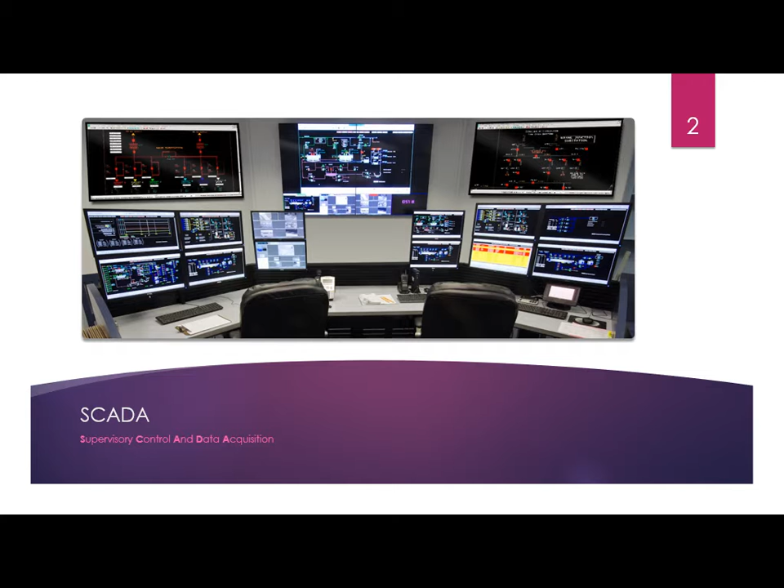What's the advantage of using such systems? Basically, having access to real-time information helps us, if anything goes wrong, to take immediate corrective actions. In addition, we can input this real-time information to simulation models, so we can have some prediction about the probable problems we may have further on, and also take some preventive actions.

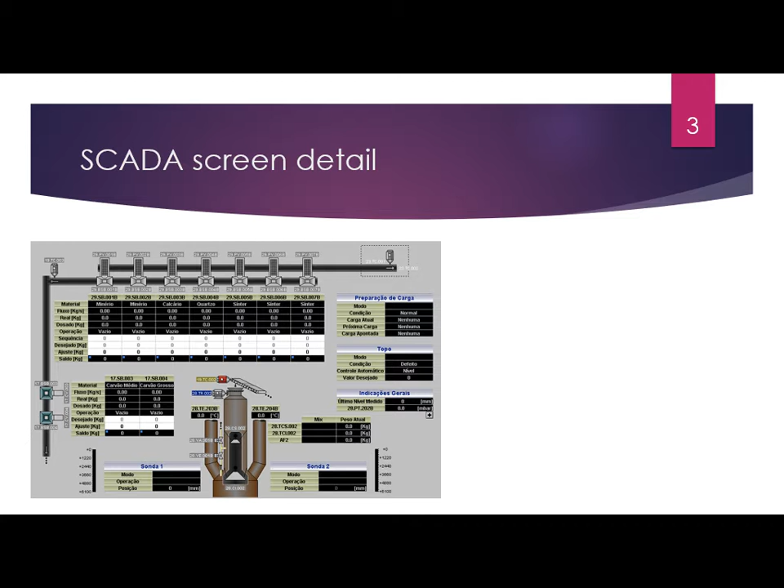This is an example of a synoptic SCADA screen detail, a real case done by my colleague Ricardo. You can see the operator has access to information about different parts of the operation and the key information about each part.

This information has different pieces: the mode of operation, so the operator can see if the operation is automated, manual, or local. Also, the operator will have access to information about equipment's status, whether it's running, stopped, or waiting.

If there is any equipment fault, the operator will see it on the screen, and if the fault is serious, the system will notify the operator with alarms. The last piece of information, maybe the most important one, is the interlock conditions of operations.

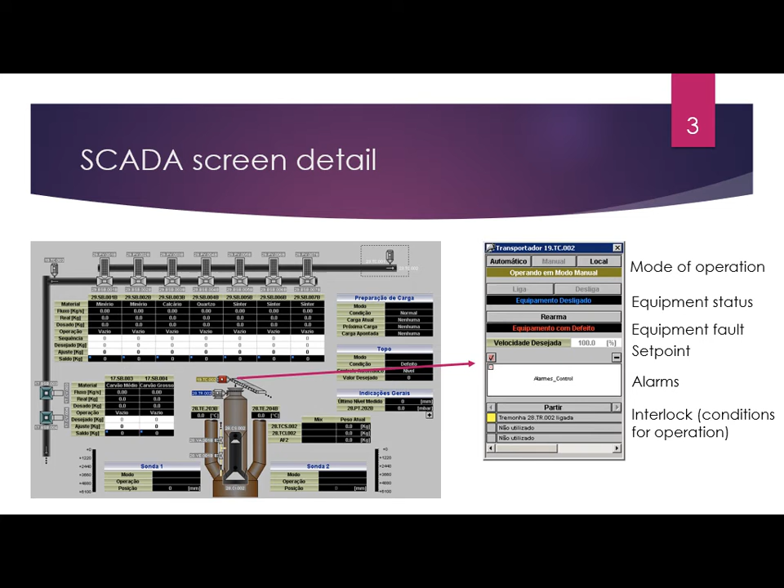But we have significant differences between manufacturing and construction. One of the most important is that in manufacturing, we are dealing with fixed routes. Basically, manufacturing products are moving from machine to machine, or from worker to worker, or a combination of them, so we have a fixed route of product movement.

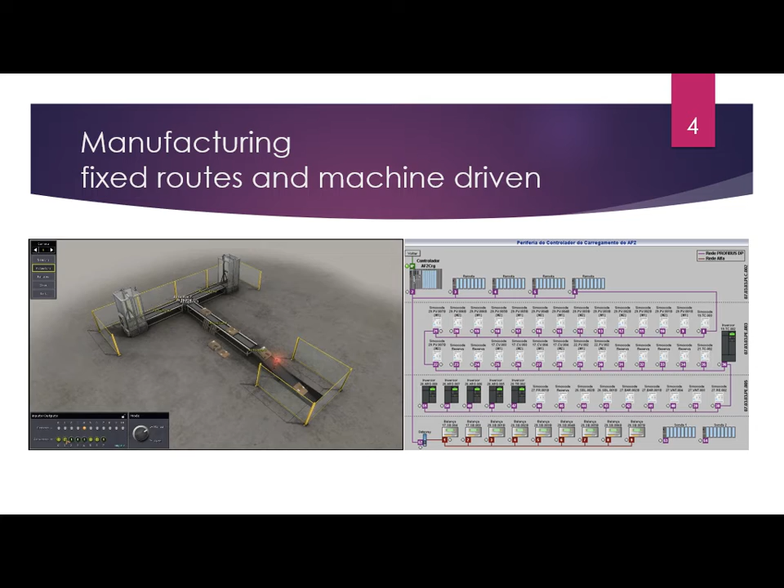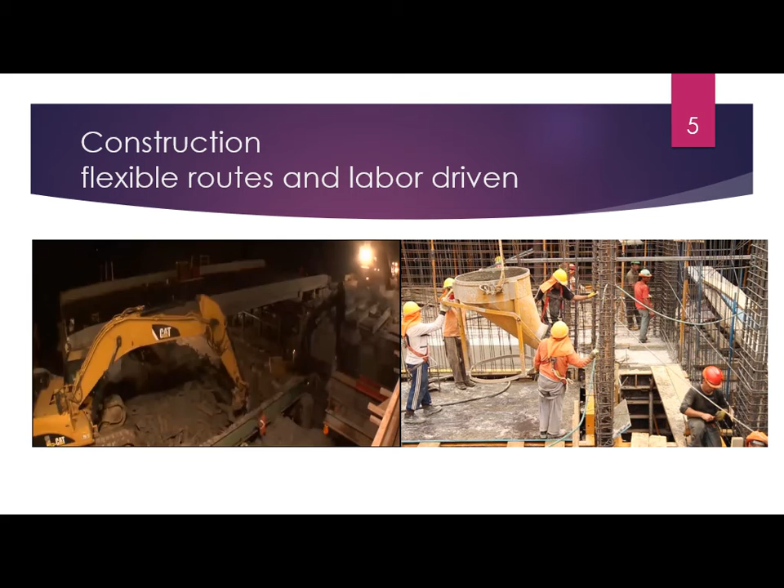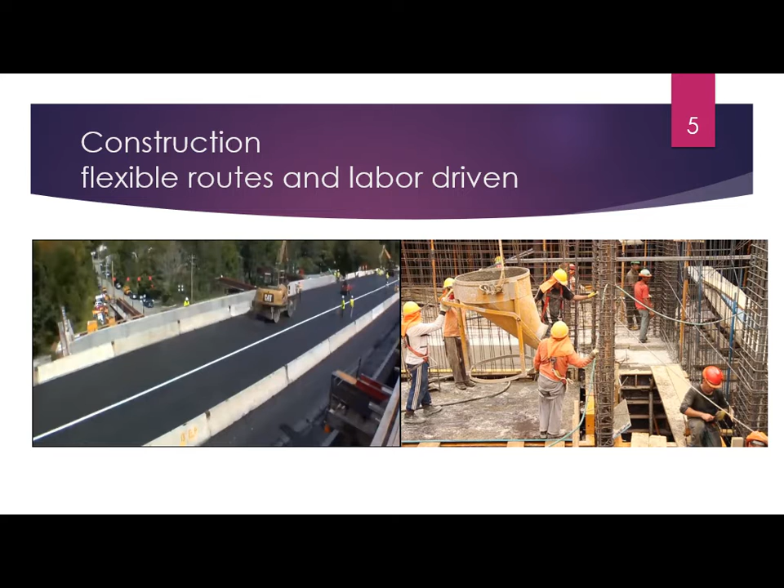Also, we have some routes which don't even exist when the project starts. This is a bridge renovation, and we have different stages. It starts from demolition, so at the demolition stage, whatever route we have is related to demolition. But then, when demolition is done, we move to installation of the prefabricated pieces, so we have completely different routes at this stage.

In this study, we try to address how we can address these issues within an integrated framework. This framework is developed based on two pillars: the observer effect and Genchi Genbutsu. The observer effect refers to a term or theory in physics; it defines if the observation act can change the event.

For example, this theory says that if we have an observation, it will alter the event. When it gets to human science, we can translate it as: observation can change the behavior. It means that if people get aware of having an observation, they can change their behavior. It can change the system and accordingly the model. So in our framework, we have included continuous observation and its effect.

The second principle, Genchi Genbutsu, is a term you know better than me. In the Toyota production system, it means get the fact, go and get the fact before making decisions. Basically, it means avoid any middle person for making decisions, get the information directly.

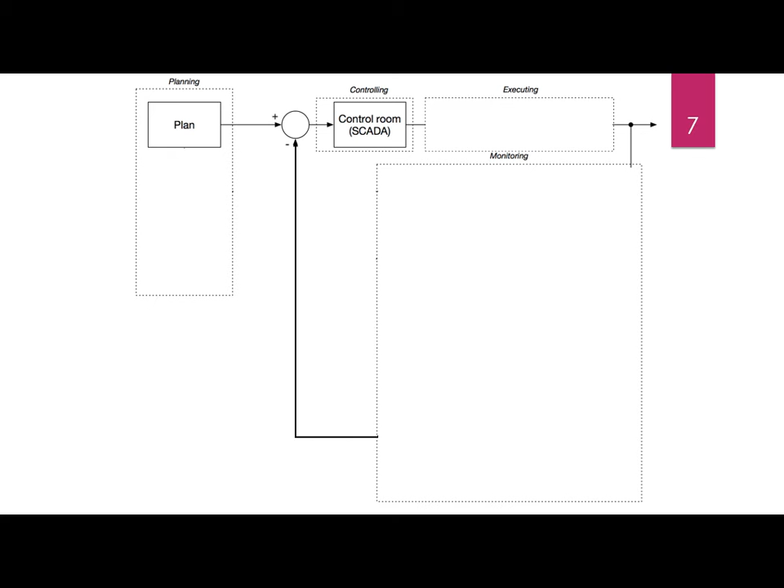In order to put these two principles into practice, we need to turn our management office in the construction site into a control room, similar to what we had in SCADA. This control room can monitor the system and steer the production. If any corrective action is required, they can send commands to the automated or non-automated parts of the construction.

If you remember, we talked about a synoptic screen we have in manufacturing. In construction, BIM can play the same role because it provides us with a 3D model and a whole set of information about equipment, workers, and schedule.

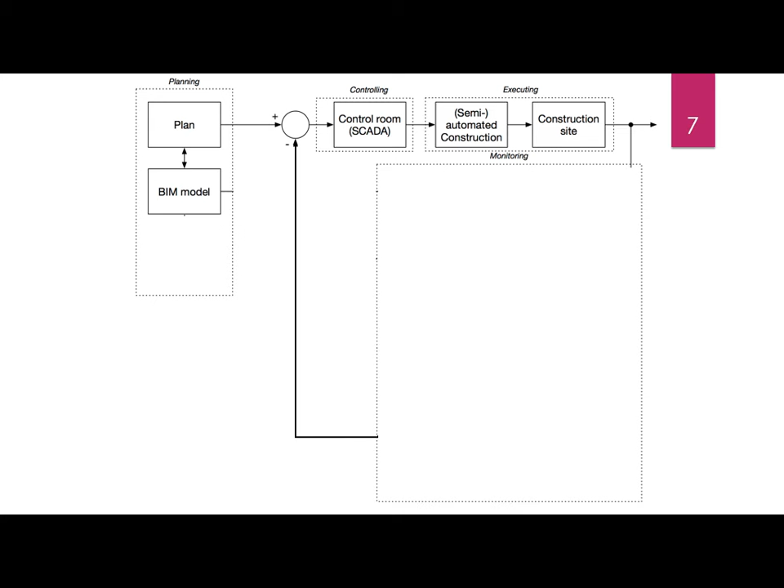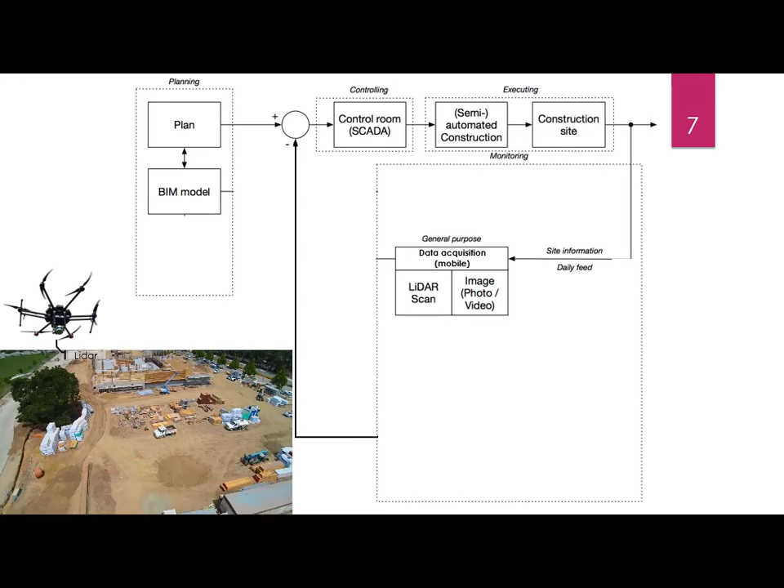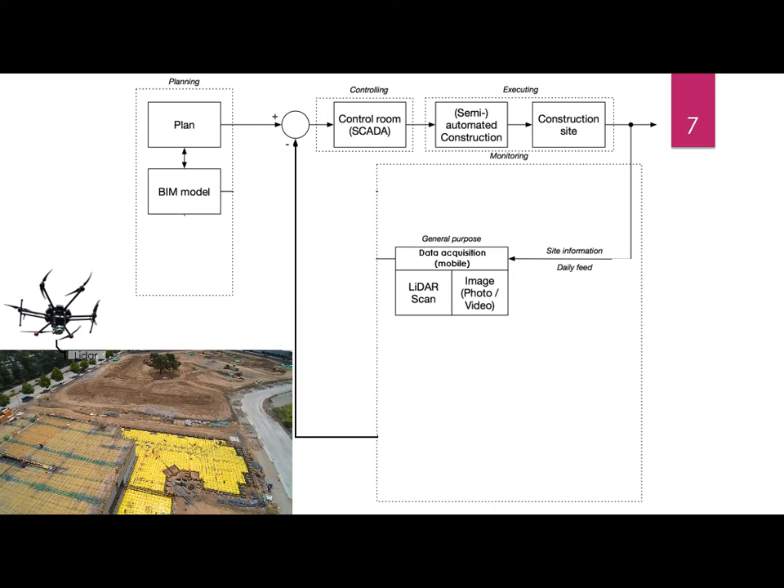So we can connect BIM to the monitoring, which in our framework can happen in three different stages. First, collecting information about the site. Here the data acquisition needs to be mobile, so we may use drones and, as discussed, LiDAR - light detection and ranging - which uses light and reflection to make a 3D representation of the construction site.

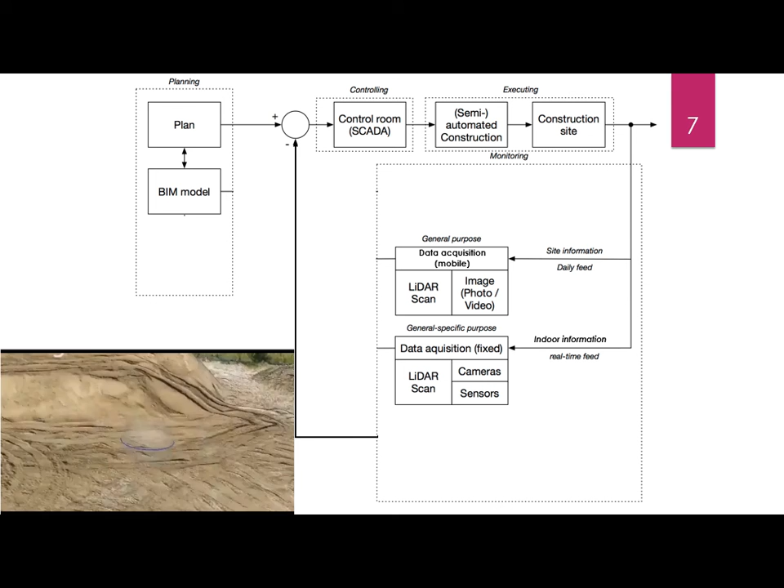When it gets to indoor information, we can again use the same system, LiDAR scanning, but with fixed equipment like sensors and cameras. We have a bunch of successful experiences using this LiDAR scanning with BIM to identify defects.

Finally, we need data from individual components of the construction production. For example, if we have GPS on trucks, or we install sensors on the helmet, we can get information about the individual components.

How can this help? Let's say the site information shows that we are short of space for piling material. The control room would know and send a command to the trucks, preventing them from going to the site and creating waste in the form of waiting time.

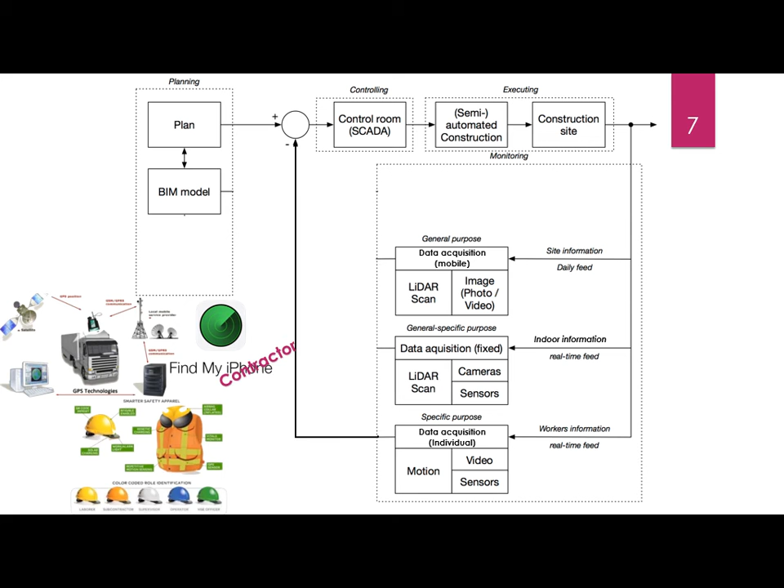Apart from that, similar to what we discussed about manufacturing, we can use this data for modeling and predicting any problem, and we can take preventive action.

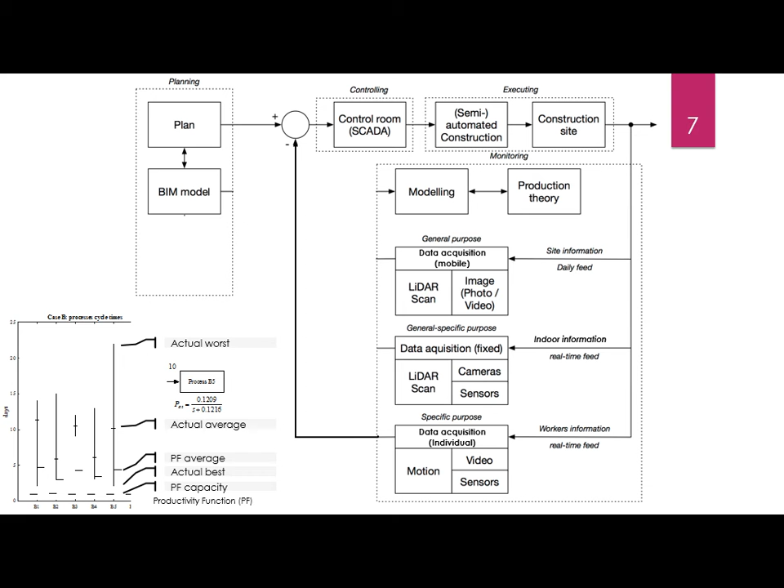But processing this much information relying just on the human brain is a hard task, so we need to aid decision makers in this regard. We may use AR or VR, augmented reality or virtual reality, to let decision makers check the outcome of their decisions in a 3D space.

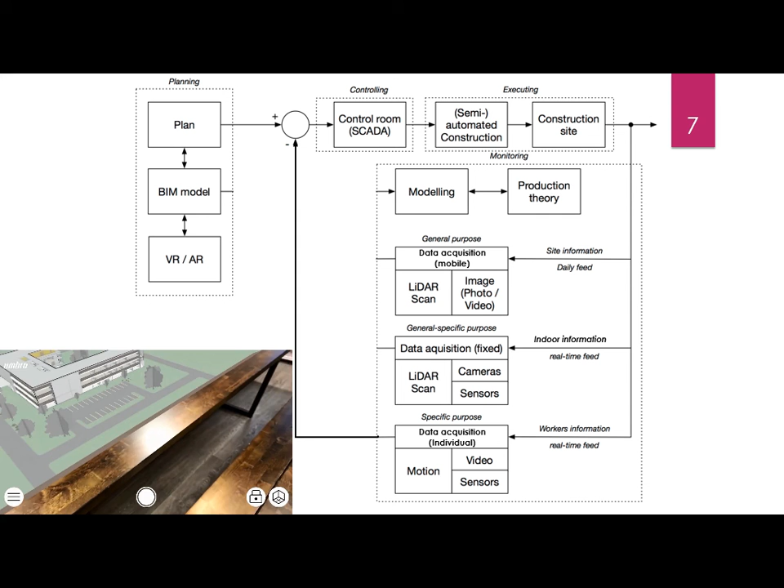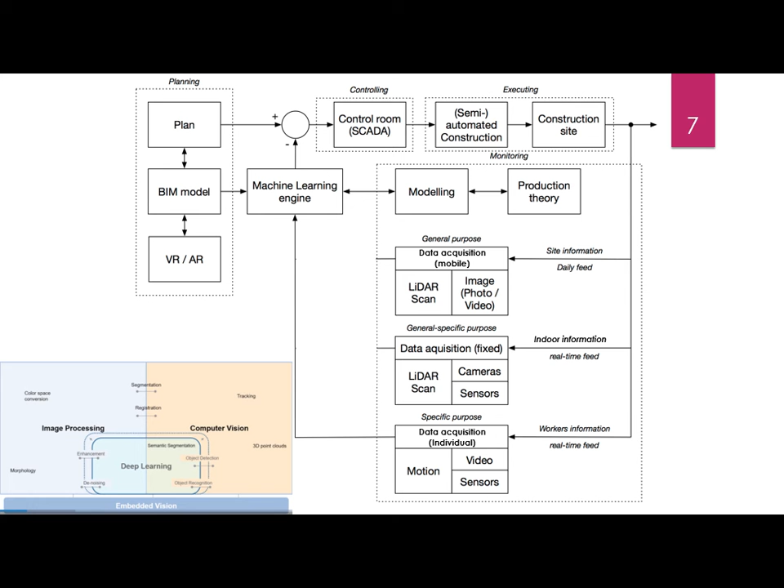Still, it would be hard to process this much information, so at further stages we may use a machine learning engine. This machine learning engine can observe the pattern in data acquisition and the decisions made, and after a while it can imitate this decision making.

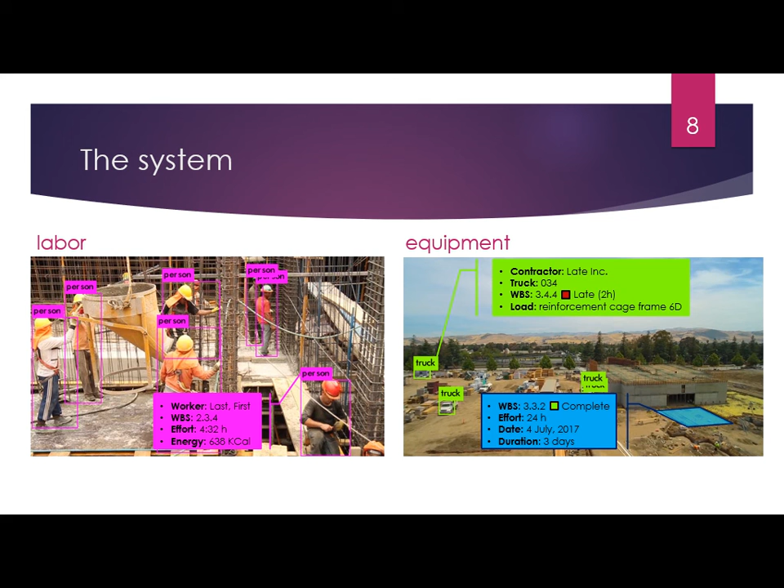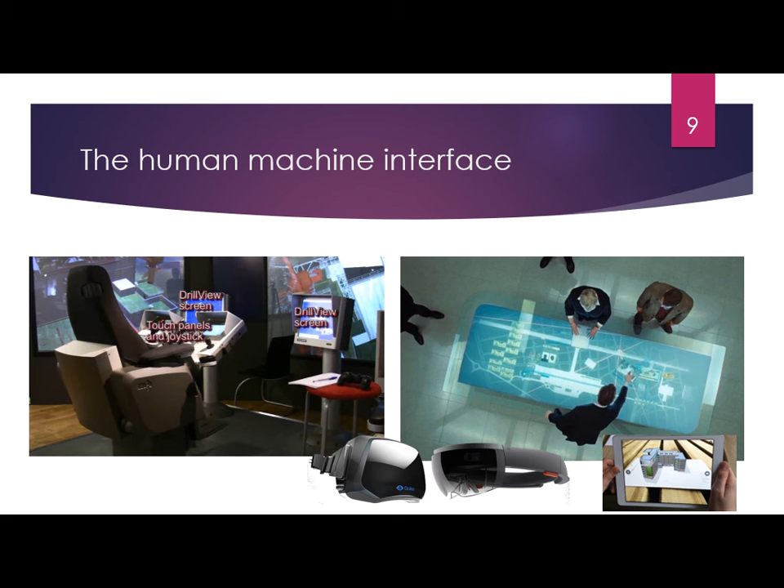This may sound a bit futuristic, but as you can see on the left, this is a control room used in an oil drilling rig about 10 years ago. So it's possible to use this technology, put these technologies together along with some new ones like headsets, and by integrating BIM, LiDAR scanning technology, and AR/VR, we can have a stable flow of information and interconnect different components. Hopefully we can bring construction productivity to a better place.